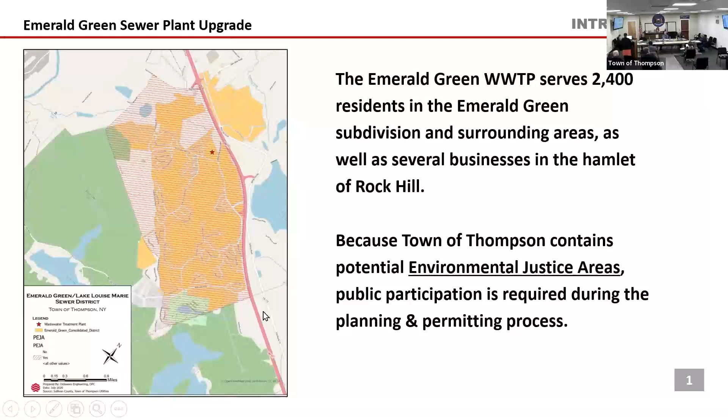So the plant was built in 1960. It hasn't had a major upgrade for almost 30 years. There are new effluent standards for residual chlorine that went into effect in May, so the plant is required by D.E.C. to install UV disinfection equipment. The town knew about the new effluent standards for a couple of years and has been working towards a solution, but it's always good to take a look holistically at the plant and what it means, particularly since it hasn't been upgraded in 30 years, rather than just do the UV disinfection that's required by the regulatory agency.

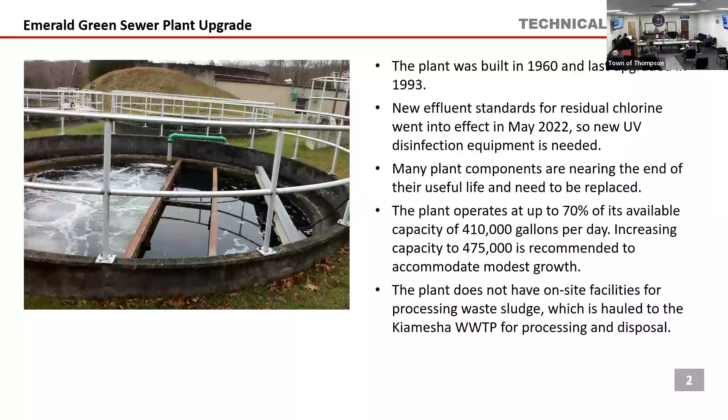We took a global view. Many of the plant components are nearing the end of their useful life and need to be replaced. The plant is operating at about 70% of its available capacity at peak flow per day. So we have requested to the D.E.C. as part of the permit process to increase the treatment capacity to 475,000 to accommodate some modest future growth over the next 20 or 30 years. The plant also doesn't have any on-site facilities for processing waste sludge. All of the sludge is hauled to the Kiamesha plant for processing and disposal, so this upgrade also includes some sludge handling to help address that issue.

The proposed upgrade, in this case, we are recommending that it be phased so that the town can address the new UV disinfection equipment requirement sooner rather than later. So it made sense to focus the first phase on the filter building, which would include the new UV disinfection equipment and replacement of the sand filter. As you can see from these photos, this is the existing sand filter, and it's in pretty bad shape. It will also include electrical upgrades and other building improvements to the filter building.

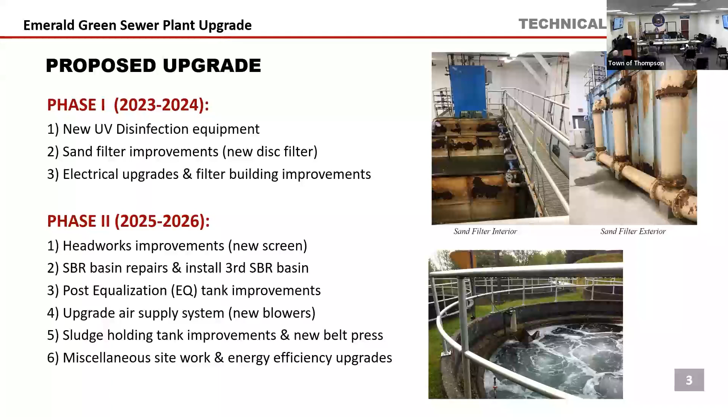So that's phase one. Phase two would be general upgrades, including some headworks improvement—that's the screening process at the beginning of the train—and SBR, or sequencing batch reactor, which is the biological process that treats the wastewater. This includes SBR basin repairs and installing a third SBR basin, which is what would give the plant the additional capacity that we're recommending. Also planned: post equalization EQ tank improvements, upgrades to the air supply system, new blowers to help with aeration, sludge holding tank improvements, a new belt press, and then just miscellaneous site work and energy efficiency upgrades.

From a site plan perspective, this is the existing filter building. That would be phase one, replacing the sand filter and installing the new UV system. Phase two would include upgrades to the biological process, a third SBR basin, and a new sludge dewatering building. The yellow areas are general repaving and site improvements.

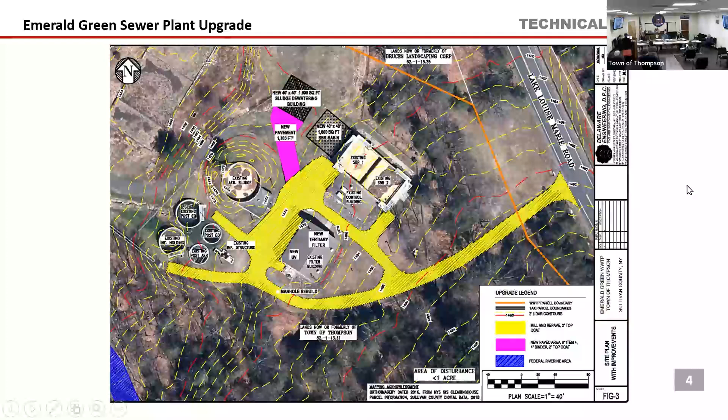The total cost of the upgrade depends on the final effluent limits from the DEC after they complete their review of the plant permit. Right now we're estimating between 13.5 and 15 million. The town passed a bond resolution two years ago authorizing borrowing up to 13.5 million. The range exists because we recommended phasing the project, which may add costs from bidding in two phases and the time lag in terms of increased cost of materials.

The town has been seeking grants and financing for the past two to three years for the upgrade. To date, the town has secured $3.8 million in grants, which will reduce the total cost. We recently found out last month that the town is also eligible for almost $7 million in BIL funding, from the bipartisan infrastructure legislation passed by Congress last year. That's not a given—it's an up-to amount pending the final financing package from the financing agency, the Environmental Facilities Corporation, or EFC. It will include confirmed grants, some BIL funding, and the balance eligible for hardship financing at 0% interest.

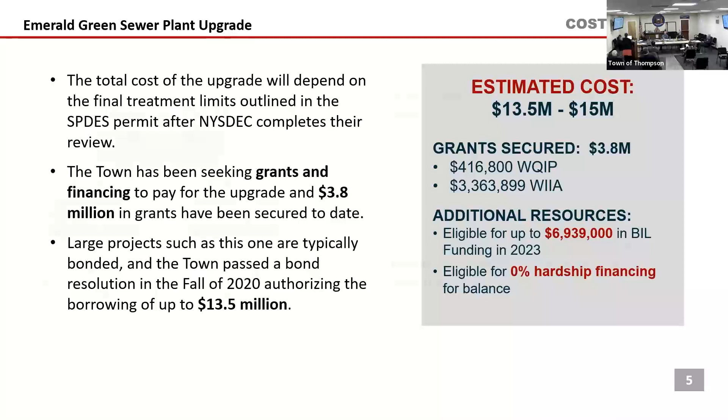The way these upgrades get funded is the town bonds the money, borrows it, and the repayments are part of the capital costs passed along to users in the district as sewer rents. A lot of people think projects like this are funded through general funds and taxes. Only properties in the consolidated Emerald Green Rock Hill sewer district will pay a share of this upgrade through sewer rents. Again, they are not taxes—anyone who benefits from being in the sewer district pays them, even tax-exempt users.

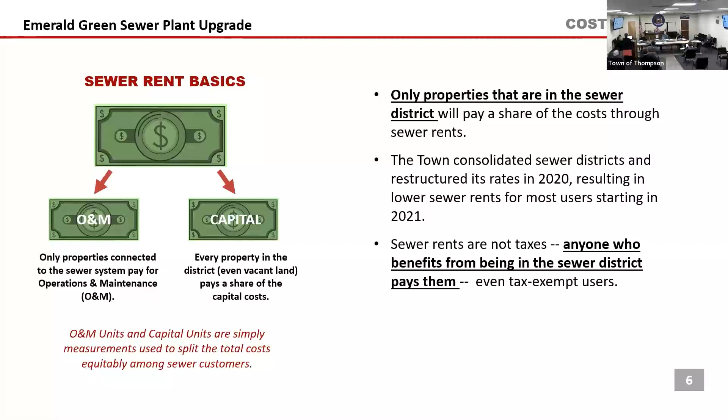We won't know the final impact to the average ratepayer until the financing package is finalized through EFC, but the town did consolidate a number of sewer districts and restructure its rates in 2020. Users in the Rock Hill district saw their sewer rents go down starting in 2021. Any increase we're hoping will bring it back to those 2021 levels, so it won't be a huge financial burden.

In terms of timeline, what's been done so far: we started working with the town in 2019 and were hired to prepare an infrastructure master plan looking at all of the town's water and sewer facilities to come up with a prioritization plan. In 2020 an engineering report was prepared, and the town went through the SEQR review process, the environmental review mandated by state law. The town passed a bond resolution enabling it to borrow money in the future for the upgrade, and consolidated several sewer districts with a rate restructuring to more equitably spread costs among impacted users.

Last year we submitted the SPDES permit application to the regulatory agency, DEC. We applied for financing from EFC and were able to secure the grants mentioned before. Plans and specs for the UV component, which is phase 1, were submitted to DEC and EFC earlier this year, and the second grant, the WIIA grant, was also recently announced about a month ago.

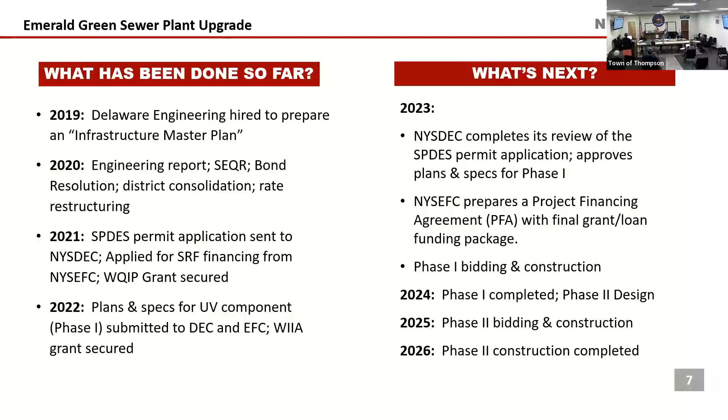The design is coming out of our Albany office. Peter Martin, who's on the call, is the lead engineer—if anyone has questions, his phone number and email are listed. There's also a website, thompsonsewerupgrades.com, linked to the town website but also standalone, containing all documents from the SPDES permit to the engineering report and site plans. If you want to dive into the details, you can download those documents there. So with that, I will stop.